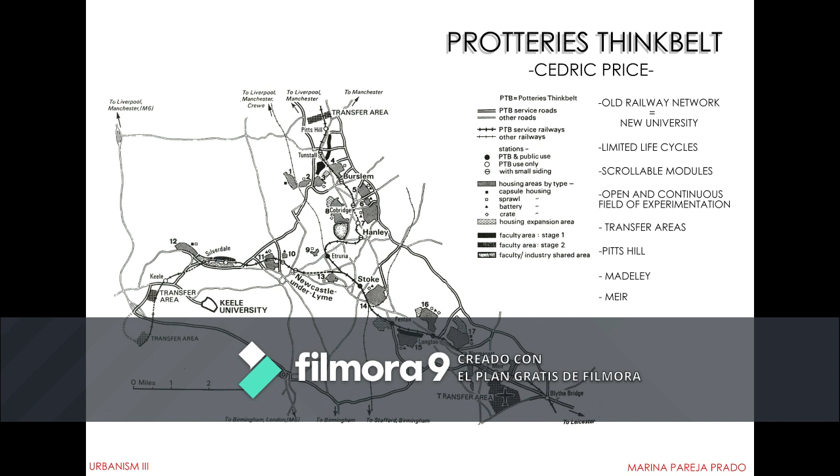The project as a whole has three main fixed points called transfer areas, which serve to connect the PTB with the outside world, reconfigure the modules, and establish the buildings that require a certain permanence. These areas are located at the vertices of the outer triangle: Pitts Hill, Madeley, and Meir.

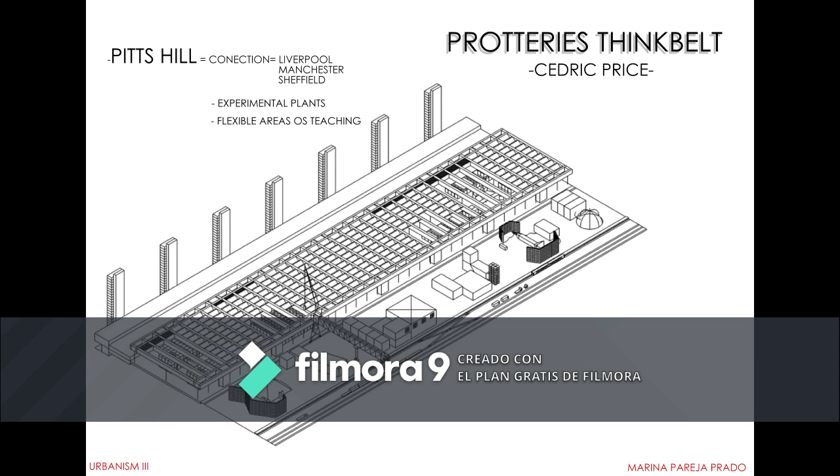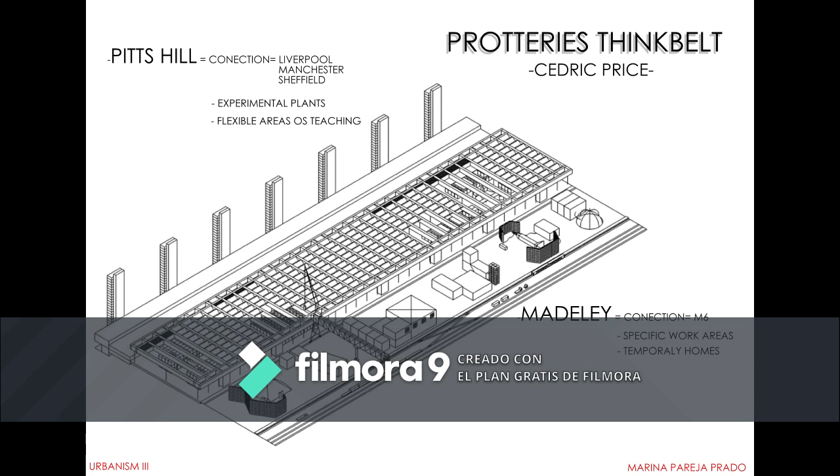Madeley connects with the M6, a motorway that connects Liverpool and Manchester with Birmingham and London, where there are specific work areas which can adopt various autonomous configurations, and towers for the insertion of box houses, temporary accommodation for staff and short- and medium-term visitors. Meir connects PTB with Leicester via road and rail.

In its vicinity there is also an airport which connects with the monorail to the interchange area. This allows a quick PTB link with anywhere in the world.

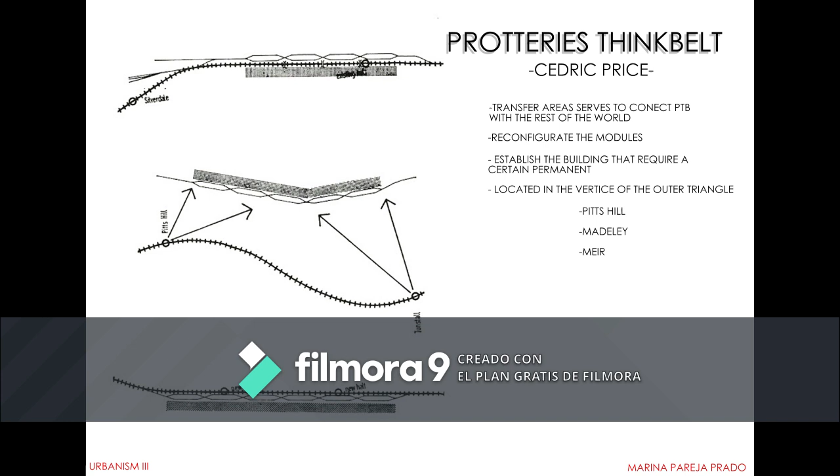Next to this transfer area there are accommodation areas for students and staff, a mobile laboratory area, and portable modules for occasional work. These areas are designed with real mechanisms including cranes, elevators, conveyor belts and forklifts, to provide quick exchanges with the outside world, and make a fast and fluid transit with PTB.

Inside the triangular space defined as PTB, the existing Stoke-on-Trent station also stands out. Programmatic variability also implies notions of change and instability.

The architecture must be adapted to the needs of the users, and as these change more and more rapidly, our buildings must be designed to withstand this without major problems. They must be adaptable at low cost, not only economic. For this reason, different configurations are foreseen for both the classroom modules and the homes, depending on their possible use.

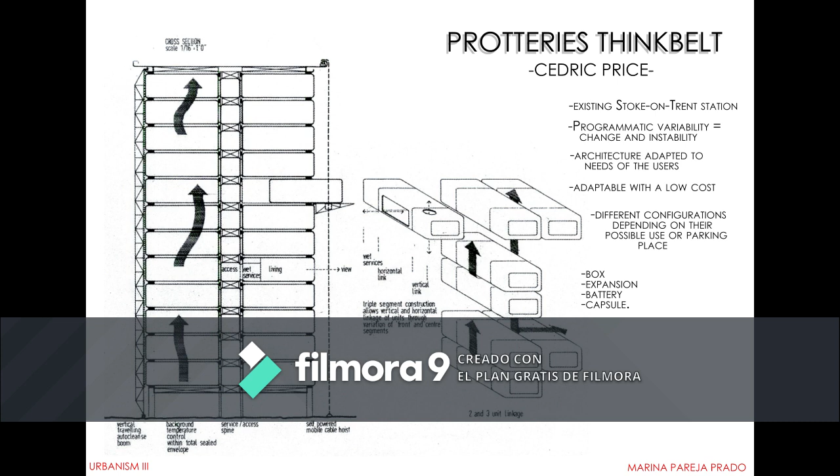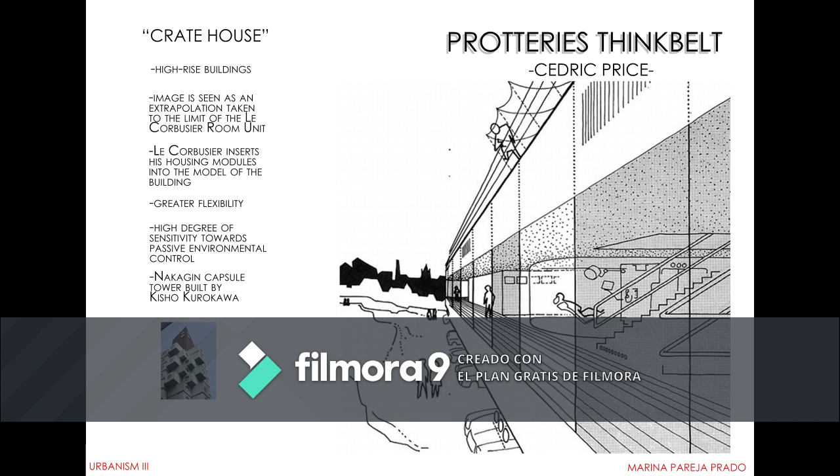There are 4 types of housing that will be distributed throughout the area: box, expansion, battery and capsule. The crate houses are coupled to a 13-level vertical concrete structure, forming high-density high-rise buildings.

Their image is seen as an extrapolation taken to the limit of Le Corbusier's room unit, where these houses would be mechanically raised to a position for a certain period of time, and after this time replaced with a method almost as easy as when Le Corbusier inserts his housing modules into the model of the building, to provide greater flexibility.

It is also proposed to use them individually or in conjunction with 2 or 3 units, which provides wide variation in the use of this domestic space. They also show a high degree of sensitivity towards passive environmental control. These types of houses are somewhat reminiscent of the Nakagin Capsule Tower built by Kisho Kurokawa.

Sprawl homes are small single-family buildings, isolated and prefabricated with a wooden structure, formed by the addition of monofunctional units that allow the possibility of modification and association, creating homes with different capacities for families of any size, age or characteristic. The units are supported by an input tray with 3 adjustable support points that allow them to be seated on all types of terrain.

Different settlements are proposed by means of groups with a linear scheme, for those cases where you want to get away from the surrounding landscape, and always with a series of shared common services that give meaning to the group, such as central heating, water and sewage. This provision of common sprawl housing services is used to improve the standards of pre-existing housing.

The 3rd type of housing is battery housing, another type of collective housing that, instead of developing in height, does so horizontally, through the distribution of modules within a large structural and common services sandwich, formed by a lower structure that serves as the floor of the houses, elevated from the ground.

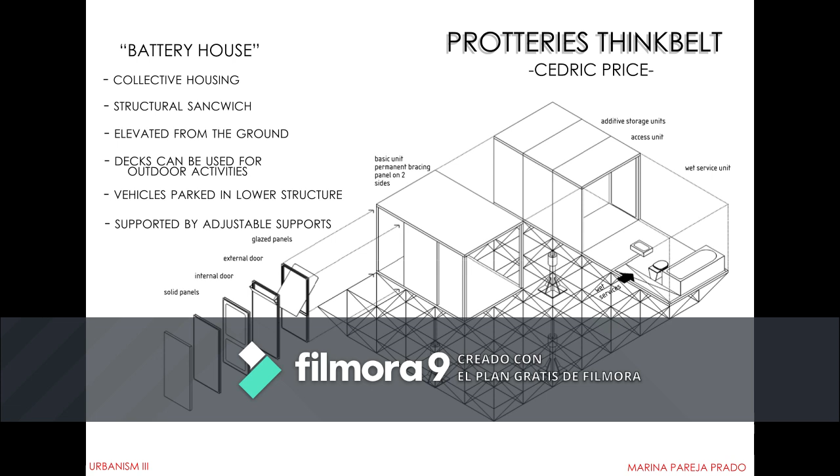The large common decks can be used for outdoor activities. Vehicles can also be parked in the lower structure of the sandwich, because the houses are supported by adjustable supports.

The last type of house is the capsule, which are small cabins next to a train or caravan car, prefabricated with a metal structure and fiber panels provided with transparent and translucent glass panels, fully equipped with folding furniture that allows the overlapping of the functions of the house, and a great economy of space. They have capacity for 1 person, but could accommodate 2 inhabitants for a short period of time.

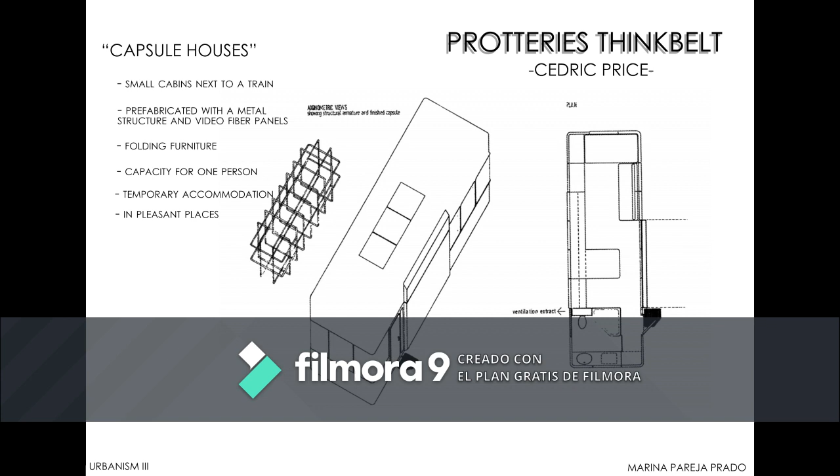They are conceived as temporary accommodation. The units are placed on high supports in pleasant places with good views.

The learning equipment is located within the internal rail system, and its configuration varies according to the needs of each center. The main nuclei of activity are linked to the transfer areas to facilitate reconfigurations to promote the exchange between teaching and practical applications. Modules are proposed that can be used as part of the normal train service or separately.

They can also be parked on a track for scheduled theoretical teaching and informal discussions. These are planned to operate autonomously by the students.

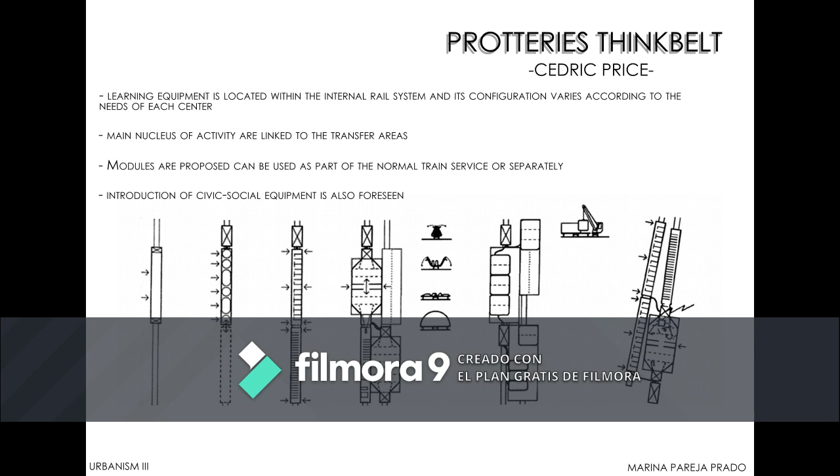In the whole of the area, the introduction of civic social equipment is also foreseen. This will produce an improvement in the living conditions of the area.